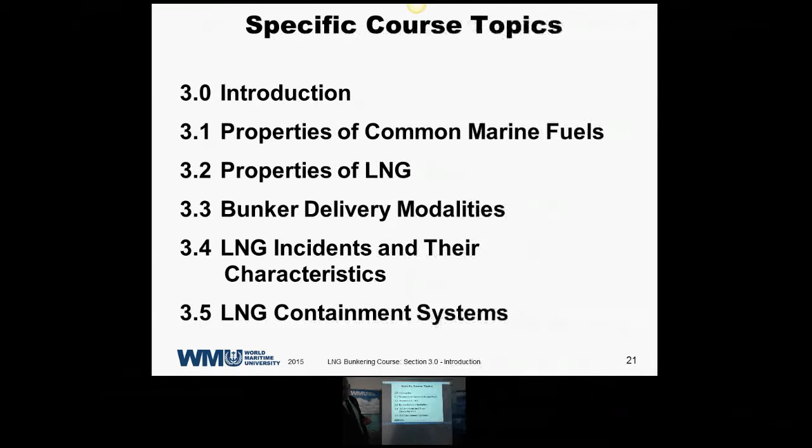It is a rather long course. Keep in mind it is 5 days. So basically this will take place tomorrow. More to come on Wednesday. Some practicalities on Wednesday and Thursday. And finally, the notorious exam. Keep in mind, it's not something threatening, it's just for quality assurance, or it makes sure that we all take part in the course.

So, what is the expectation from the students, or how students should prepare themselves? To begin with, we all know that this might not be available. Ideally, Module 1 should have created this background. However, keep in mind that the content of Module 2, this is not a requirement. This is nice to have, not a must-have.

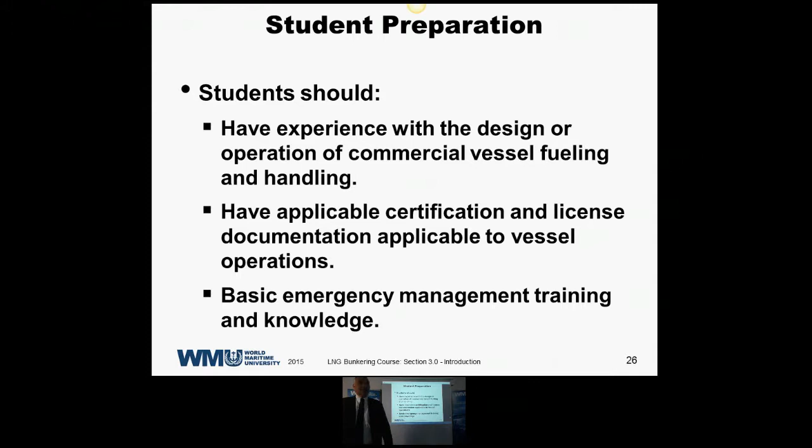For those that will take part in the course, because the practical element will be reinforced, it will be a necessity to have applicable certification. For you, it's not. Okay, and basically, to have some basic emergency management training and knowledge, I'm expecting that up to a level this is available from each and everyone that is taking part in this course.

Now, there is an academic, I would say it's more industry-oriented textbook, which is this one. A lot of the material in the course is reflective with contents in this book. Furthermore, for those that want to deal more, there are supplemental readings, these two being the strongest example.

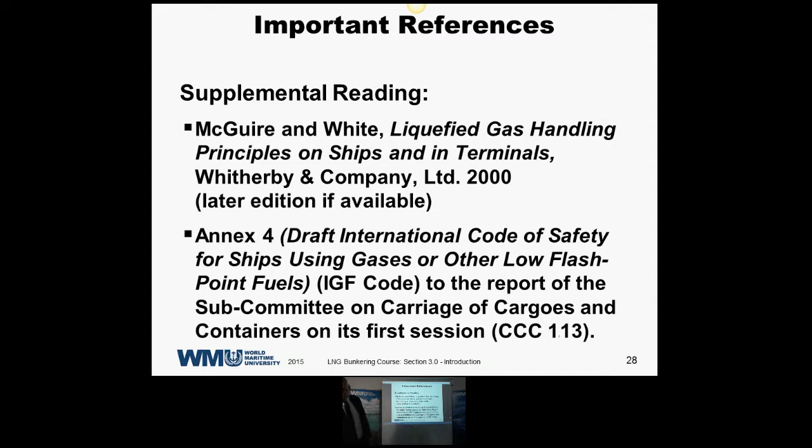And of course, you cannot get away from the classification society. So basically, this is dealing with the security aspect. However, there are also important guidelines from the classification society. And if anyone wants to deal more, feel free to browse through these two important documents.

Now, hopefully you had enough with the orientation. Even the UK should probably be awake by now. So, the purpose of what follows is to provide a short explanation to create a uniform background, even if you don't have previous experience with LNG or even the maritime industry.

An important thing to note, public understanding in discussion is still limited. The public right now has some type of fear. If you see an LNG bunkering operation and you see some type of steam or fog, you're getting worried, is it working properly? Is this done the right way? Is it safe? To remove any worries, yes, it is completely safe. If it's done properly, let me put in brackets.

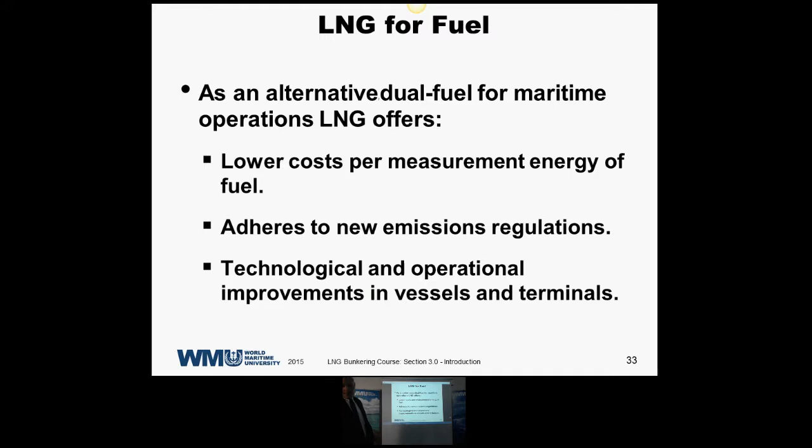Especially in Europe, the European Union is strongly promoting the use of LNG. In the United States, based on the recent developments on emissions, there is a strong interest for LNG, either in conversion of old vessels or mainly in new builds. Especially in regions like Scandinavia or in both coastlines of the United States, which follow into the SECA regime, LNG is a very good and cost-efficient way, let me add, in order to conform with these strict regulations. The SECA is, you can find the explanation of the acronym over there.

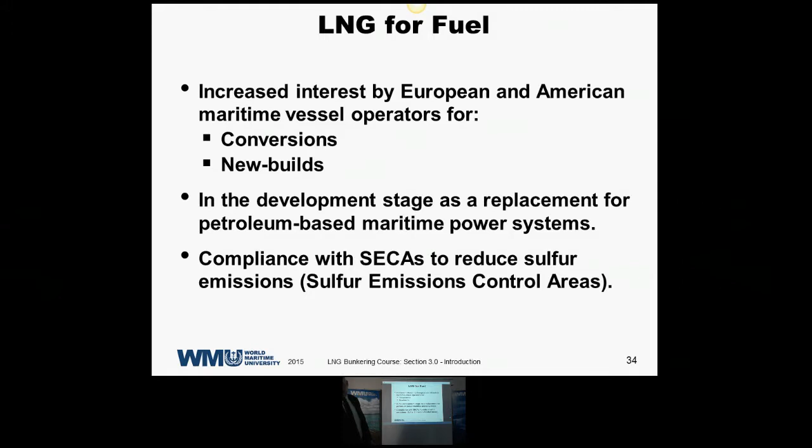So, what is the current status? In Europe, right now, we have roughly 50 ports that can serve LNG bunkering. The idea is, within a rather optimistic framework, to achieve capability in all major European ports, and by 2025, in all inland waterway ports.

So the idea is that Europe will be LNG compatible in the near future. Things to note, however, through the IMO regulatory efforts, this will be alleviated.

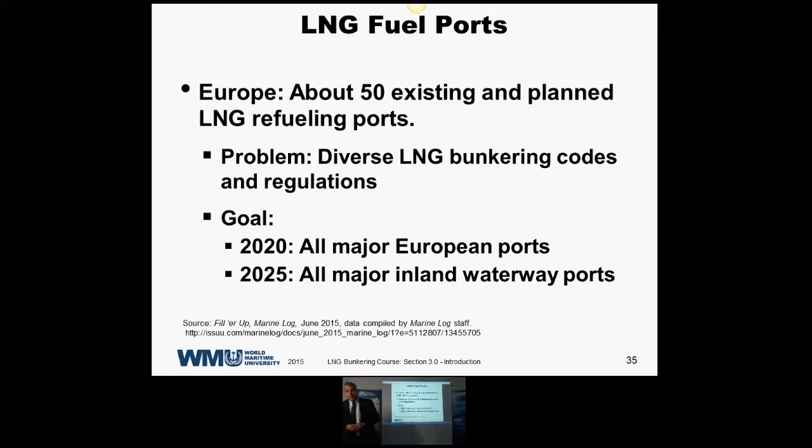A very important element, in order for LNG to be used, it needs to be cooled. It must be cooled heavily in order to be turned into liquid. Keep in mind, it's gas, so you need to freeze it heavily and turn it into liquid. Then you can store it in some type of tank and transport it.

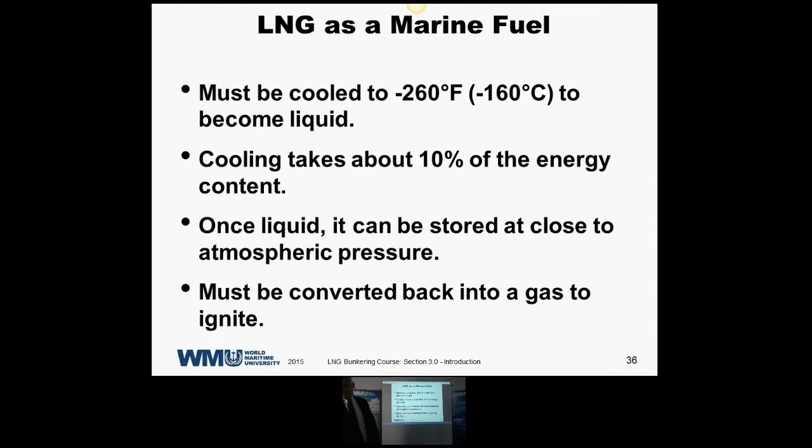Why cylindrical? For uniform compression reasons, with the respective insulation, in order to maintain its low temperature. Then suddenly you have increased your storage capacity compared to conventional fuel tanks. So you might have less performance, but you are having more fuel available.

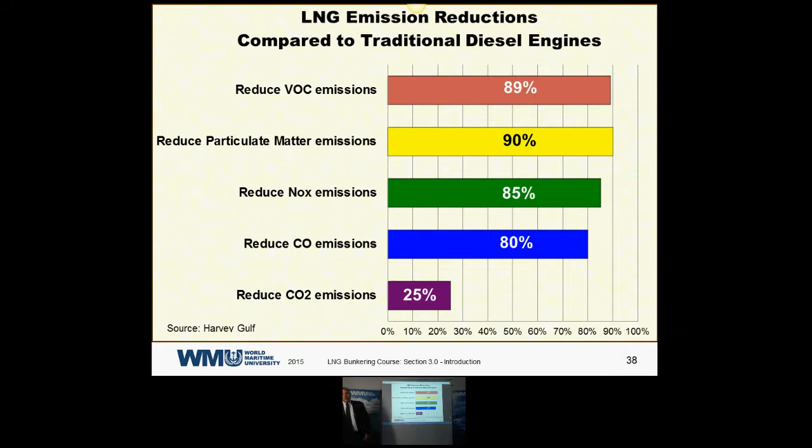If we look back into history, LNG is not something new. In 1959, it was the first effort. Over the years, there was an increase.

Let me also say that very recently, developments that took place in Japan with the destruction of the nuclear reactor, and the decision of the Japanese government to stay away from nuclear energy, heavily promoted the use of LNG in the Asia region. So practically, during the last couple of years after the Fukushima destruction, tremendous quantities of LNG were transported towards Japan in order to support its energy needs.

If we want to take a very quick look at the design, which hopefully Module 1 has covered the great majority of all this - basically, this is the standard form of an LNG tanker ship. So what do you have? You have a vessel that is capable of carrying the tanks.

I will not provide any more details on this issue. This was covered in Module 1 extensively. However, in order for everyone to have a uniform background, when we are talking about LNG cargo ships, this is what we expect to get.

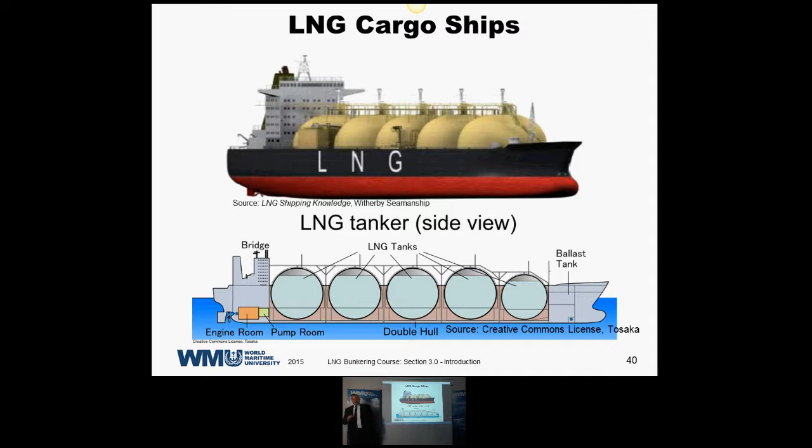Let's also provide a short explanation of the whole LNG fuel transport process from the source up to the end user. So definitely you need some type of refinery that will load the ship. There are other means of transport such as trucks or barges, self-propelled or with a tugboat, and they can deliver to various fuel stations, if we can use this term.

So for example, here we have a fueling station on land that is used in land transport, or we have bunker stations that are serving ports, or large bunker vessels in order to serve the end user - a truck, so he will go to the respective fuel station, or ships.

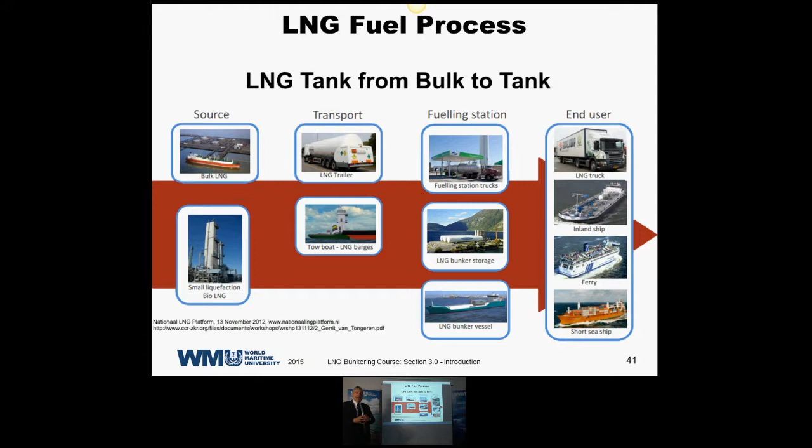Keep in mind, for the time being, because the infrastructure is limited, this is a rather short endurance. You cannot go to any point of the world, from any point of the world to the other, with LNG for the time being. You need refueling, infrastructure is not there yet. However, in the years to come, infrastructure will be greatly enhanced.

Some examples. So basically, for ferries and short distance shipping, this is a very good example. So in the United States, in the Great Lakes, or in respective areas with short distance, so ferries. In Canada.

When you have standard routes such as the service of an offshore platform, it is easy to allocate this task to an offshore supply vessel. You know point A, you know point B very well, you know the endurance of the ship, then why not take advantage of lesser emission and cheaper fuel?

And of course, keep in mind recent developments. It's not only ferries that are doing short distances. You can have passenger ships, such as the Viking Grace. The Viking Grace is serving a line here between Finland and Sweden.

It's not only passenger ships. Recently, there were new builds that are serving containers. This is a container ship, and this is the proposed layout for propulsion. So this is a container ship.

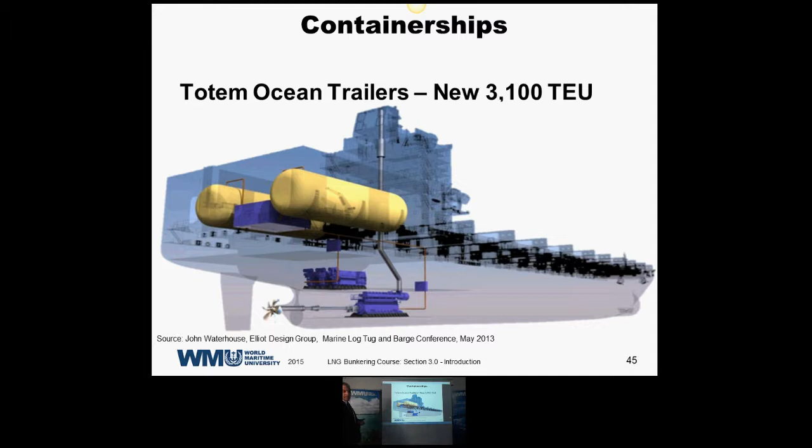But keep in mind, in the long run, there are only dedicated ways to make sure that bunkering is taking place. These are the alternatives: on the pier via truck, or on the pier by a dedicated vessel. If it is a dedicated truck, or if it is a permanent infrastructure in the form of pipelines, it makes no difference. Or the other way is to get a bunker vessel alongside.

Similarly, like fuel oil is transported in major ports, the infrastructure is not there today.

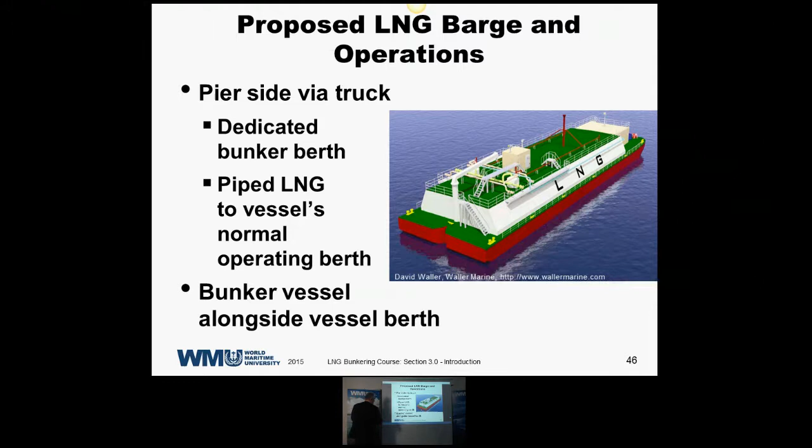So, to recap, LNG is steadily gaining on ground. Here are some potential projects. You can see that transport capacity in the domain of container ships is steadily increasing, and very recent developments, since now infrastructure is booming, large passenger ships, such as those coming from Carnival, will be using LNG as their means of fuel.

So clearly, there is a tendency to promote LNG further. As infrastructure for bunkering is expanding, so will end users take advantage of this opportunity. Because of two main reasons, lower emissions and cheaper fuel, clearly LNG holds a comparative advantage.

So to cut a long way short, very recently, Carnival - and why are we using Carnival? Because Carnival is one of the largest, or the world's largest, cruise ship owners, has finalized contracts for four mega passenger ships, because the capacity is extremely large. Clearly, if you are willing to allocate the safety of all these passengers to an LNG vessel, I'm guessing that any fear related to LNG operation and bunkering should not be there in any place.

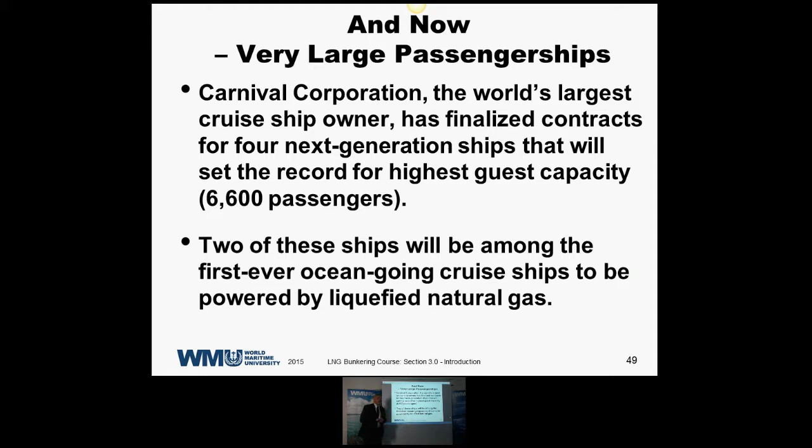Who else? We've mentioned Carnival. Clearly here in Scandinavia, because of the regulation of SECA, Norwegians are also pioneering this domain.

Initially, in order to create a link with Module 1, at the end of this presentation, we will show a video of the operation of an LNG tanker. Unfortunately, when you are relying on YouTube for issues like that, the owner of the account can remove it, so it's not available. So, although officially in 3.0 there was a video from YouTube, this was substituted by supplementary material from DNV GL that will explain the bunkering taking place in exactly this location.

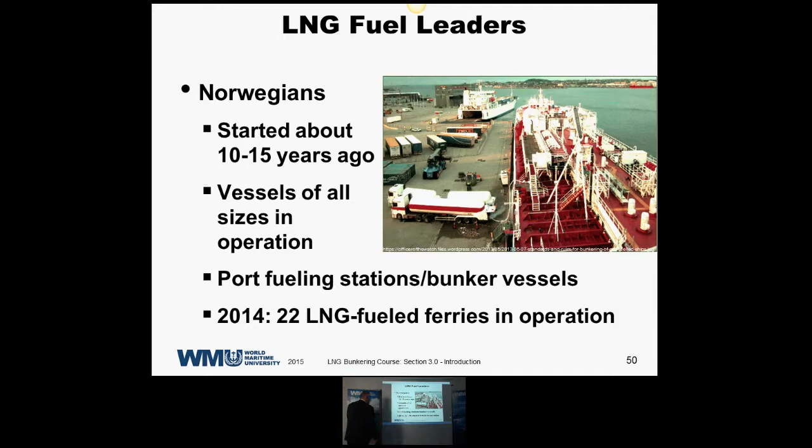So Norwegians, or the whole Scandinavia, and also Western Europe, are strongly promoting this - Netherlands, Germany, Belgium. There are other partners, or different projects within the EU trying to promote the use of LNG in various ports. The United States were mentioned earlier.

Ferries. The question here remains, however, infrastructure is expanding significantly. And we all know that infrastructure and the end user are strongly related. So as infrastructure is expanding, the end users will be more willing to take advantage of LNG. As the end users are more willing to take advantage of LNG, the more infrastructure will expand.

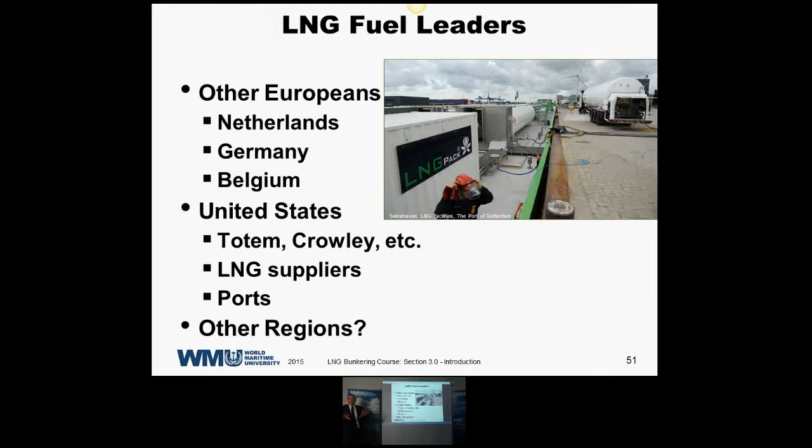Now, not everything is without precaution. You need to take into account that spills can happen. So basically, you can have a spill. But, as you will see later in this course, there are responses and ways of dealing with this type of incident.

This is another issue that needs to be addressed in this course. This is why - you cannot see it with your own eyes, you cannot smell it, there is no color indicated. So definitely you need special equipment to be able to deal with ensuring this is not happening.

And of course, we need to think about what if a spill develops into a fire incident, and what are the potential ranges. So in order to mitigate that this will never take place, if you don't want a fire, you don't want a spill to take place. It's as simple as that. So avoid any spill and you reduce the chances for a fire.

And the terrorism issue, we will highlight but not deal with too much. Keep in mind, those that are not experienced with LNG have the tendency to say that an LNG tanker is a floating bomb. At any case, an LNG ship is not a floating bomb.

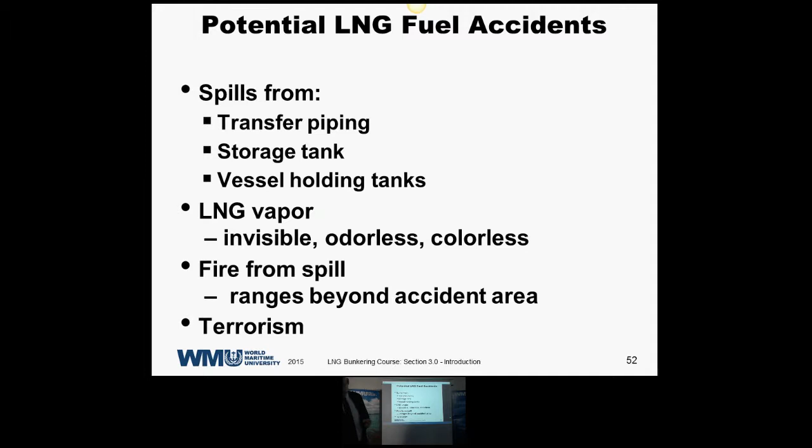The industry and IMO have taken every measure to ensure that LNG transport and bunkering procedures are completely safe. And if you apply the right security measures, everything will be safe and secure. Of course, in order to do that, you need to increase safety and risk management on board vessels and within the port.

Keep in mind that LNG shipping up to date has an excellent safety record, basically zero incidents. This is a strong indicator that practices employed in this specific domain are quite safe. And of course, one of the main purposes of this course is to make sure that this excellent record will continue at the same pace.

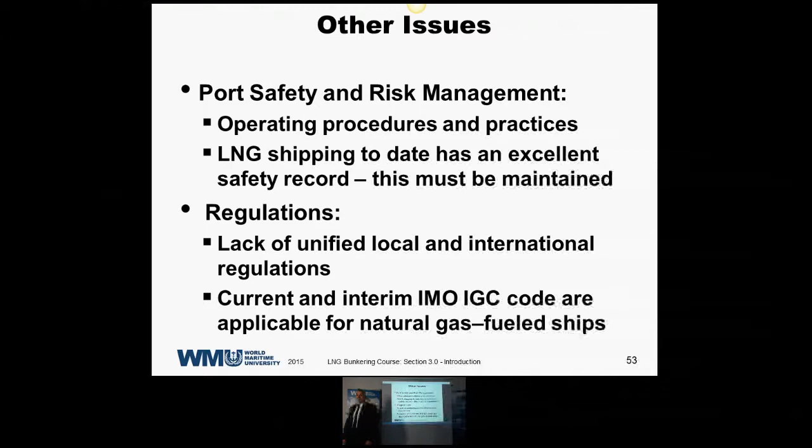Food for thought: yes, we're still not uniform in regulation, however, IGF is already in place, and hopefully these efforts from IMO will make sure that everyone is moving in the same direction.

There are issues. For example, there is the need for environmental assessments. Definitely we need to make them mandatory.

Public opinion - for the time being, the general public is not educated well enough about LNG. So one of the main purposes of this course is to transform you into ambassadors about LNG safety. And these are the main topics that we need to further address in order to change public perception about LNG.

Is it possible to maintain zero level of accidents? Yes, it is. How? Good training and enforcing safety culture.

Terrorism, hopefully we will manage with preparation and risk mitigation. And of course, we need to discuss the interface of maritime transport with other modes of transporting LNG, because as we know, every time there is interaction, there is an increased level of risk. Different mentality, different language, different habits, different type of training.

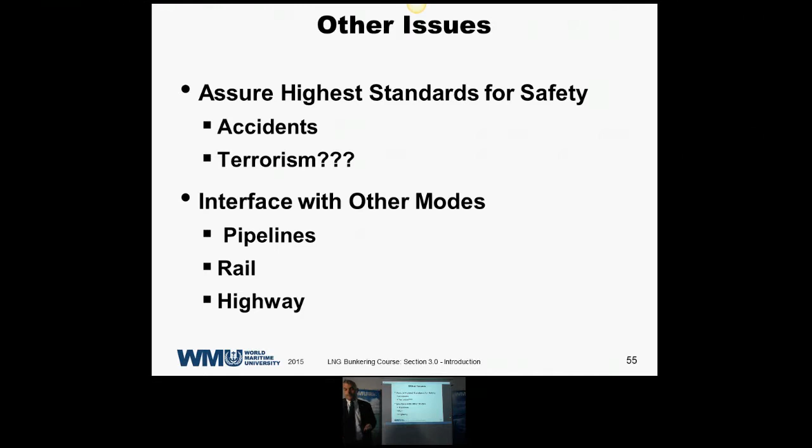Reaching the end of the introduction, hopefully we have covered, if anyone was missing some elements of module 1, with only one slide. So I need you to focus on these issues.

Yes, LNG operations, bunkering operations are complex. But if you train properly and if you employ your training right, it can be done safely.

LNG demand is increasing globally. Keep in mind that for the time being, there are already significant dual fuel ships involved in maritime transport, such as the Viking Grace. But of course, there are still pending issues. Not everything is solved yet.

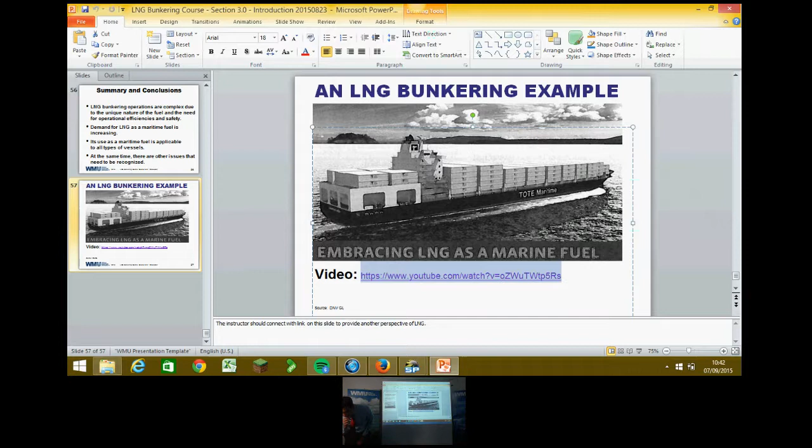Thank you. Yeah. I'm okay, I'm okay. Sorry? Yeah. Yes, we are. Should we mute ourselves? We can.

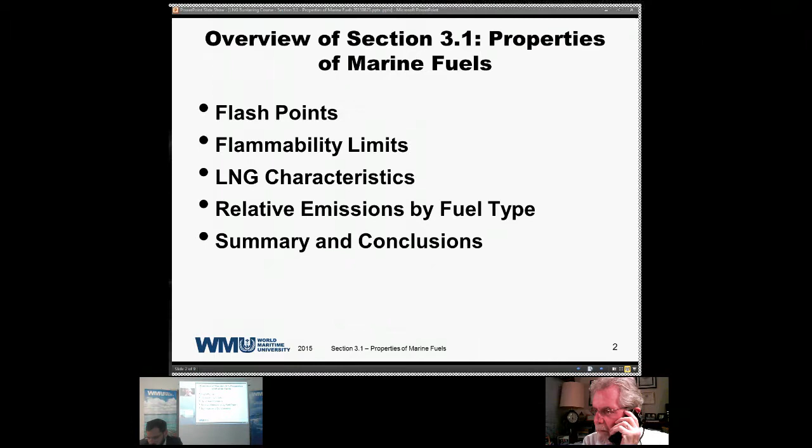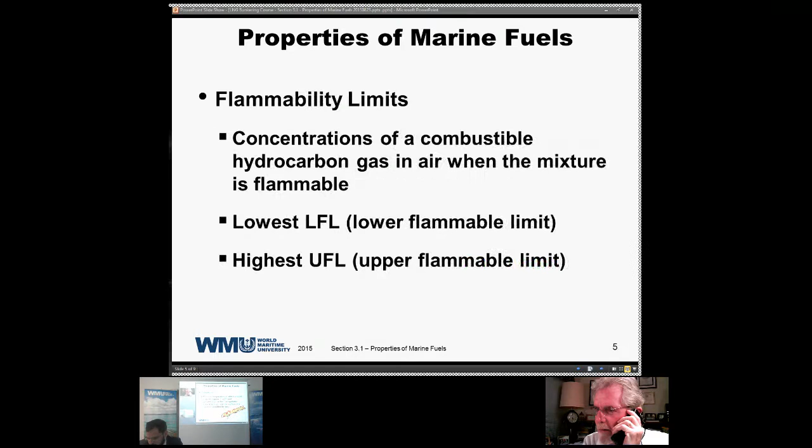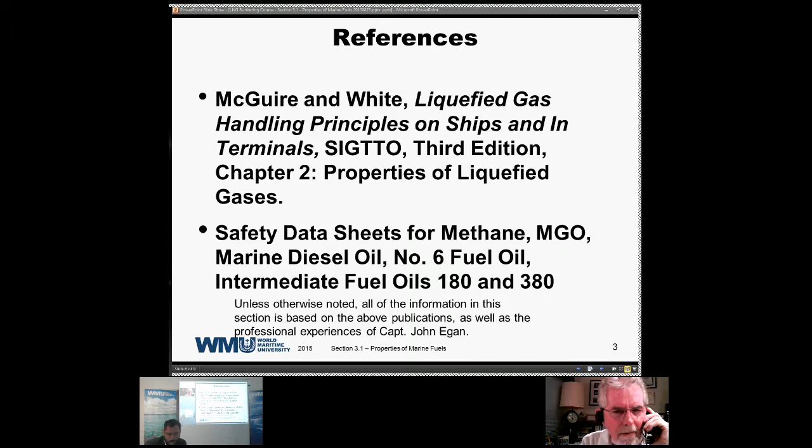Okay. And he can chat with the student on the text if there's anything you see as you're going through, if somebody sends you a question. Okay, good, perfect. So we're good to go right now then, right? We are. Okay, that's straight for us as well. Okay, very good. Talk to you later.

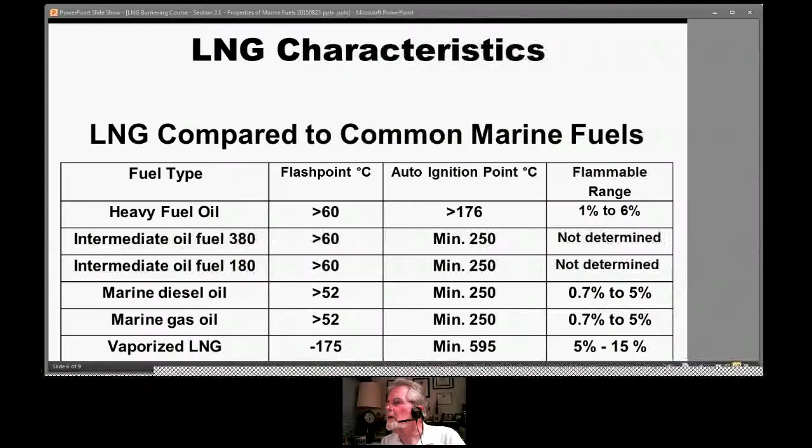These have the same characteristics. They have a flash point of about plus 60 degrees centigrade. They have a very, very high auto-ignition temperature, which is the temperature at which it will ignite. If it just reaches that temperature, the fuel will ignite and burn. And they have a flammable range that's relatively lower than what we normally find, about 1 to 6%.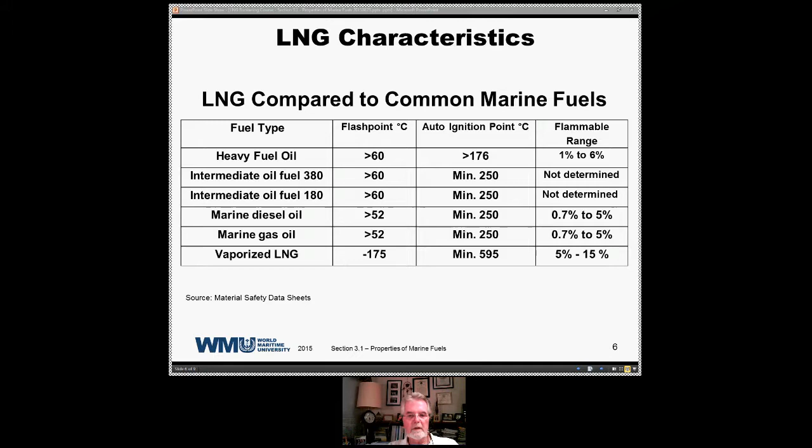We could then go to marine diesel oil, your marine gas oils. These are a little bit more refined product, but they're also more expensive, with less emissions than bunker C, but still a relatively high amount of emissions.

And then we have our vaporized LNG, which has a flash point of minus 175... minus 170. Don't believe that, I believe that's an error. I have to double check that. And I apologize for that.

Okay, I'm going to... okay, I'm sorry about that. I will double check that and get back to you on that. That's, I don't believe that's correct.

And you have an auto-ignition point temperature of 595 degrees centigrade. So you can see there are some relatively big differences in how this particular product reacts, and what has to be done to it in order to use it as fuel.

We'll quickly take a look at the relative emissions. And for some reason, we're not sharing this. I don't know why. Okay, you can see the PPT. Okay, all right, I'm not getting indication on my screen. Okay, thank you very much. And I will get that correct number for you.

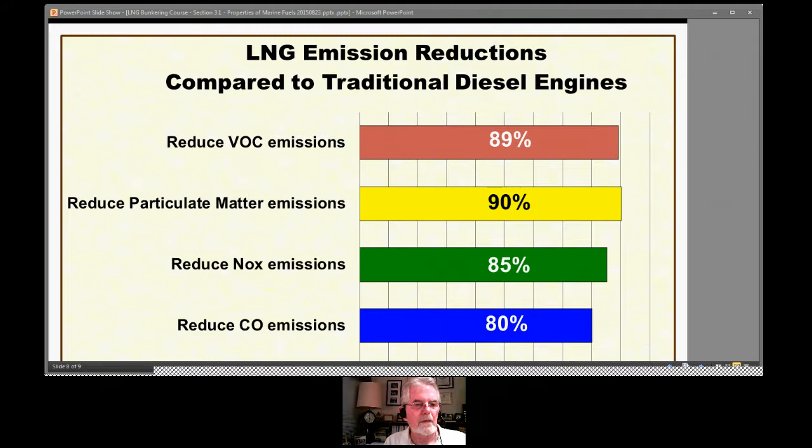You don't have to be rocket scientists, any one of us, to understand that by using natural gas as a source of fuel, we are going to greatly reduce emissions, and environmentally, this is a very, very friendly fossil fuel.

Is it the ultimate answer to emission reduction? Probably not, but it will be an interim step as we continue to increase our knowledge and technology. Once that's done, we'll probably find more fuel-efficient means of fueling vessels, as well as fuels with even less emissions than natural gas. But for the foreseeable future, we're going to be seeing the use of natural gas on a worldwide basis.

So keep in mind the definitions of flammability. They are important properties of marine fuels, and characteristics demonstrate the commonality and the differences, especially in emissions, which is the major point. The establishment of this is the platform on which we build.

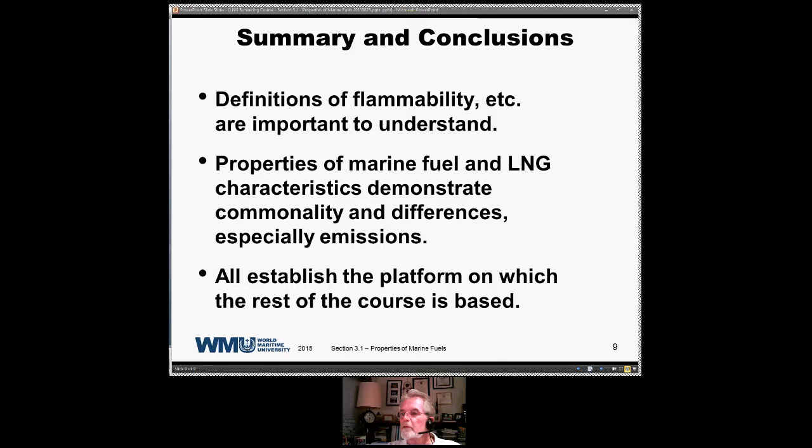I'm going to back up here just a little bit, because these are important items. Okay, flashpoint and auto ignition.

Flashpoint is the minimum temperature at which a liquid gives off vapor in sufficient concentration to form an ignitable mixture with air near the surface of the liquid, as specified by a test, and this is determined under laboratory conditions.

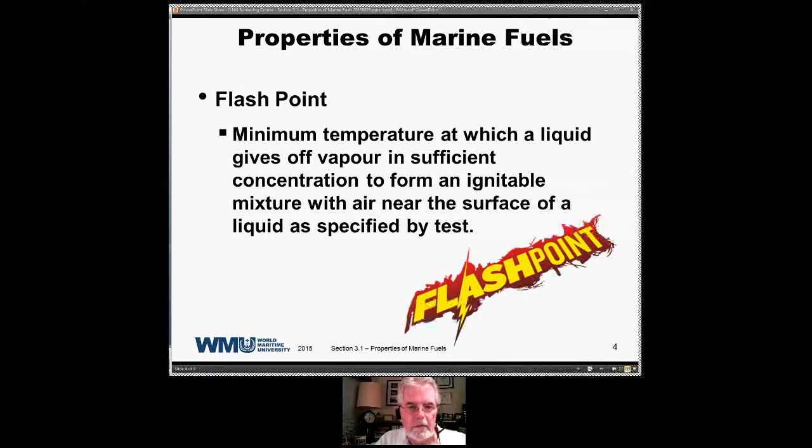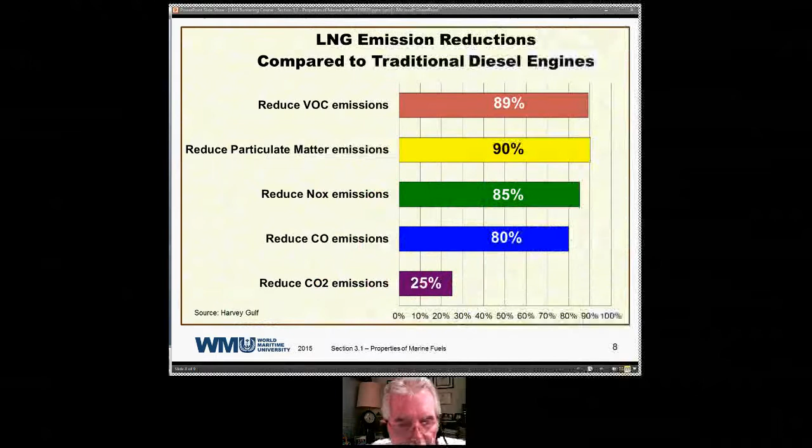Auto ignition, and this is important, remember flashpoint. Auto ignition is if you heat marine heavy fuel oil up to 160, 176 degrees, it will ignite.

So that's the difference between auto ignition and flashpoint. Flashpoint is the temperature at which you get a vapor that, if you get a source of ignition, will ignite. Auto ignition is the temperature at which it will automatically ignite on its own once it reaches that temperature. So bear in mind the differences between these two, flashpoint being important as well as auto ignition.

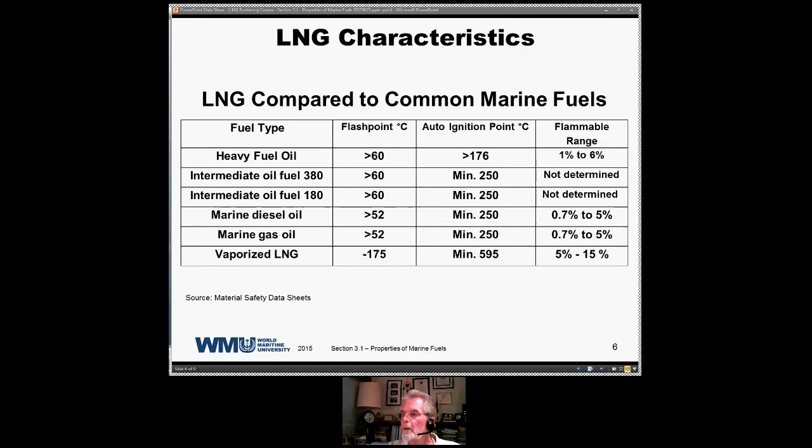As we go through the course, please kindly note, if I say something's important, please take note of it. This will be helpful to you when you get to Friday. All right, let's move along here and get into our second section.

Properties of LNG. We're going to take a look in this section at the components of LNG, properties, composition, characteristics of natural gas. We're going to take a quick look at what are called the gas laws, the ideal gas laws, saturation pressures, flammability, and vapor dispersion.

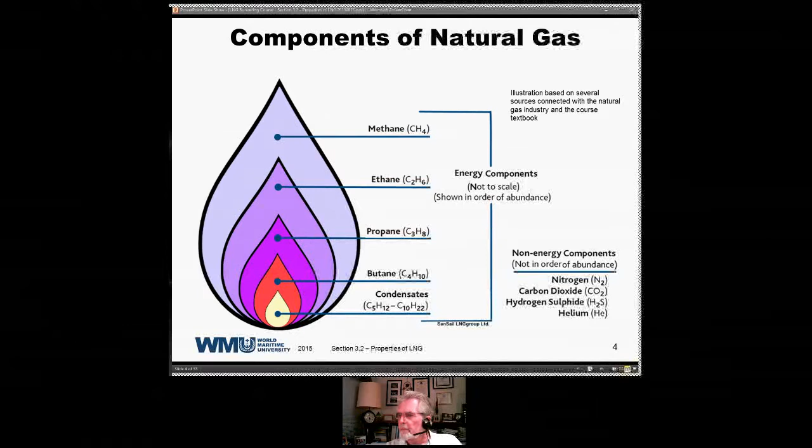You may find up to 1% nitrogen in a cargo of liquefied natural gas.

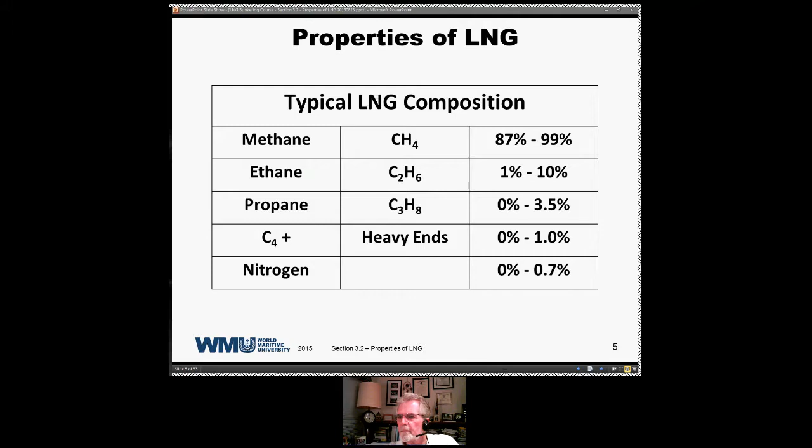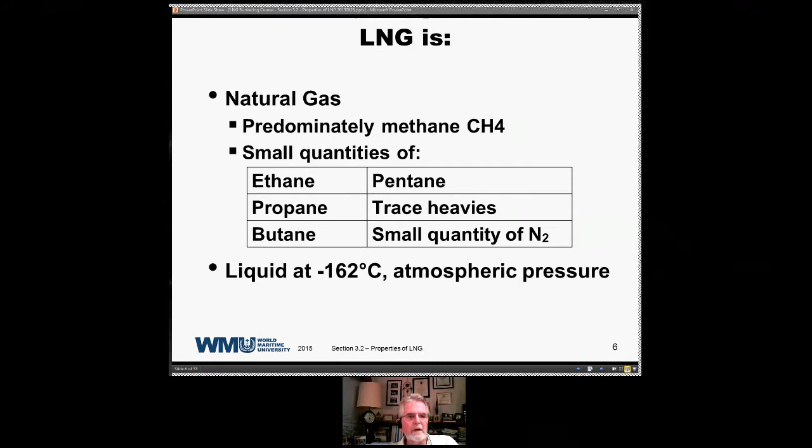Natural gas is predominantly CH4 with small quantities of other components like ethane, propane, and pentane. It becomes a liquid at minus 162 degrees at atmospheric pressure. On LNG tankers in international trade, the cargo is carried at approximately atmospheric pressure, slightly above, at around minus 160. Carriage conditions range from atmospheric pressure to 10 bar.

You're going to find these higher pressures with a particular type of tank. Internationally, there are two types of tankers used, and as I said, you're going to carry the LNG at atmospheric pressure. There are some smaller vessels.

The density of the cargo ranges from 470 kg per meter cubed to 360 kg per meter cubed. Normally it's in this little bit higher range as a typical LNG cargo that you're going to find on an LNG tanker.

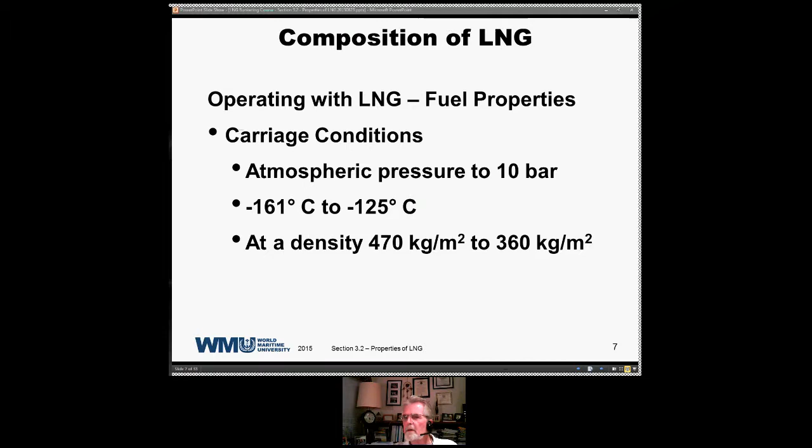We're probably looking at something like 500 ships in international trade now - I'm pretty sure we're up into that range. These ships are very, very sophisticated, very robust in their construction, and have a safety record that is probably the envy of the international shipping industry.

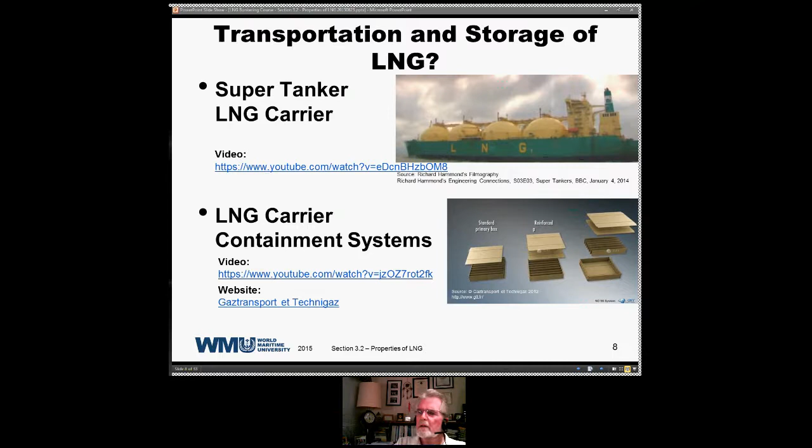The LNG has to be cooled to approximately minus 160. Cool, compress, cool, compress. And at minus 160 degrees it becomes a liquid, and at that point it consumes 1/600th of its original volume. This is what makes the transport of LNG by vessel feasible - otherwise it couldn't be done. If you were trying to transport a vapor, first of all you couldn't build a ship big enough, and you can't build pipelines big enough to transport the volumes we're talking about.

So we take this product, we cool it down to minus 160. It takes on to form 1/600th of its original volume, and we now find it economical to transport, handle, and use.

At ambient temperature, because it's much higher than the liquefaction temperature of LNG, the liquid is always boiling. The best comparison is a pot of water on your stove that you heat up until it boils. This is what LNG liquid looks like inside the tank of the ship. It's constantly boiling. At the surface, the liquid turns to vapor, and as it turns to vapor, it removes heat from the environment, and that removal of heat keeps the liquid cold. So it's always boiling and cooling, boiling and cooling.

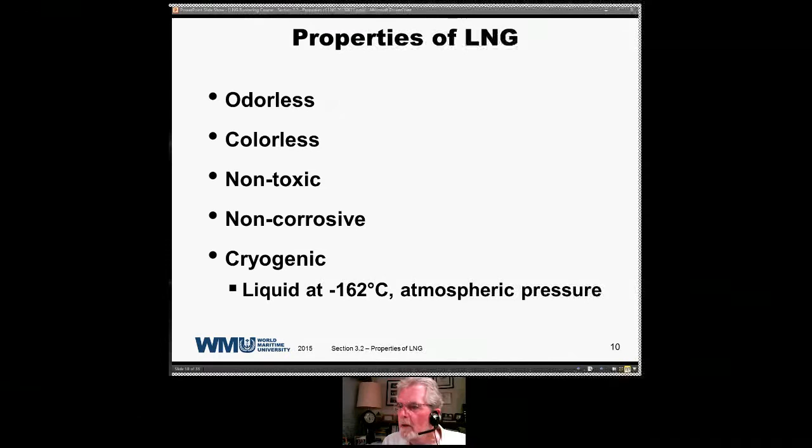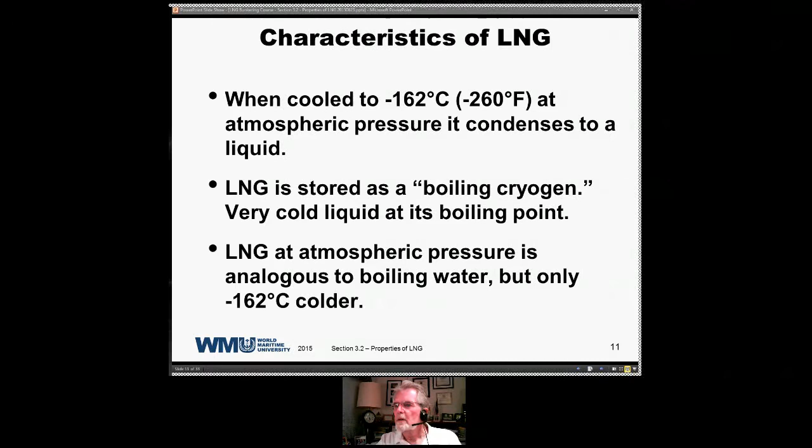Okay, characteristics again. When cooled to minus 162 at atmospheric pressure, it condenses into liquid, and it's stored as a boiling cryogen. As mentioned, it's just like a pot of water heated up to 100 degrees that boils - this is what LNG does. It boils. It's a very cold liquid at its boiling point, about minus 160 degrees at atmospheric pressure. The temperature of the boiling water, to run back to that analogy, doesn't change even with increased heat. It's cooled by the steam evaporating from the surface, cooled by the natural gas evaporating. It stays at a constant temperature, kept at a constant pressure.

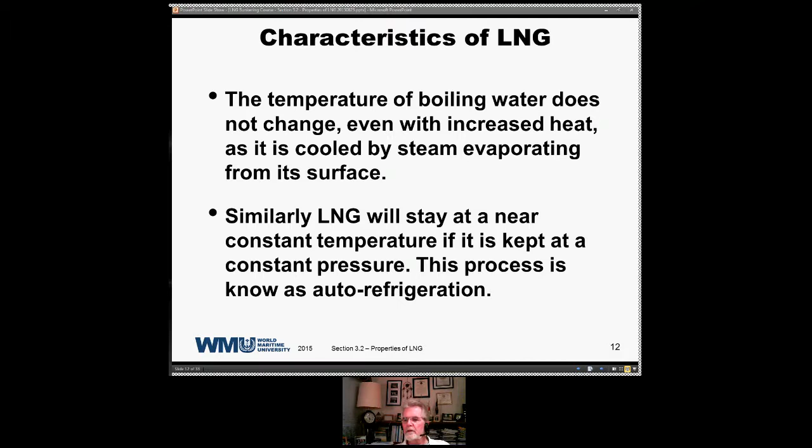This process is known as auto-refrigeration. So if someone asks you how this stuff stays cold, you just say it's allowed to boil - it auto-refrigerates. You can use this same analogy with boiling water, just that it happens at a much colder temperature. So as long as the LNG boil-off vapor is allowed to leave the storage tank, temperature will remain constant. You have to allow this to boil when it's on board the carrier vessel.

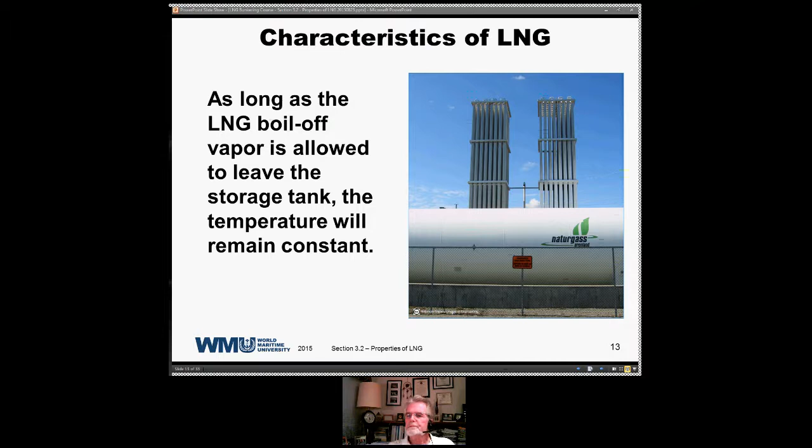There's a phenomenon unique to LNG called rollover, and this is something a vessel doesn't worry about - the vessel is a dynamic platform. But it is a concern for shore tanks. As LNG weathers, the density increases due to the higher percentage of ethane and propane in the mixture. How does that happen? Well, the methane in the natural gas boils off before these other components do - minus 160 degrees for your natural gas, and your ethane starts to boil around minus 80. So the ethane, propane, and other heavy ends stay liquid longer because they boil at a much higher temperature.

As the methane boils off, the product vapor leaves and the product is left at a higher concentration of propane. So if you're filling a shore tank, and you bottom fill it with a lower density, colder, unweathered LNG, you can cause stratification, getting a heavier layer of weathered LNG forming above a less dense lower layer.

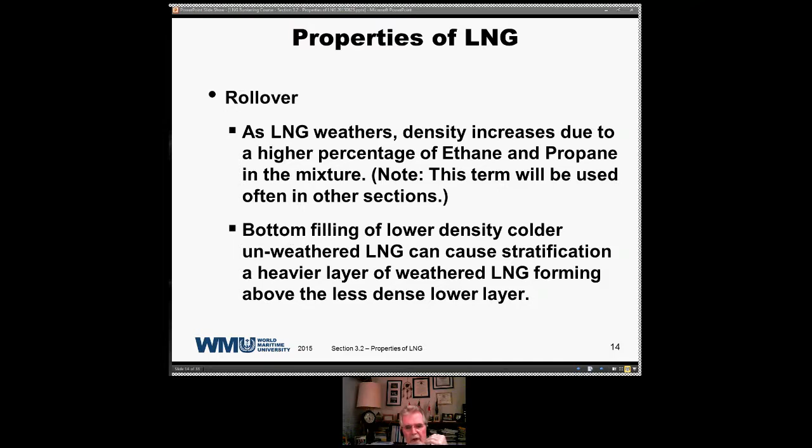When this happens, you get a tremendous increase in pressure in the tank, and this pressure increase can be such that it will damage the tank. So this is a concern. It's important for shoreside personnel to pay attention to how your tanks are loaded and how the cargo is transferred from tank to tank, and that pressures and temperatures are monitored at all times to prevent this from happening.

So rollover is a spontaneous mixing that takes place to reverse. It's an instability you have in the tank, and it results in a rapid release of boil-off vapor. As I said, it usually occurs in shore tanks where there's no dynamic forces to cause mixing.

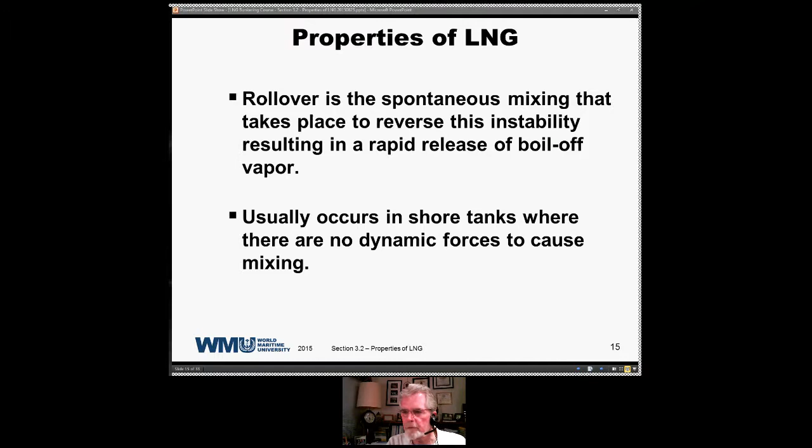I'll touch briefly on the gas laws. I'm a sailor, folks, I am a sailor. I'm not a chemist, I'm not a physicist. If your background is in this area, please bear with me.

I'm just going to briefly go through how gases react under ideal conditions. There's no such thing as an ideal gas, however there are relationships that have been described that explain the phenomena we observe in the handling of LNG boil-off, and also with all other gases.

With LNG boil-off, if the product temperature is increased, there's going to be an increase in pressure. If you decrease the temperature, there's going to be a decrease in volume. And if you increase the pressure, you're also going to have a decrease.

One of the first gas laws is Boyle's Law, and this applies to gases at a constant temperature. Volume of gas is inversely proportional to the absolute pressure. As you can see, as the pressure increases, volume decreases. This will hold.

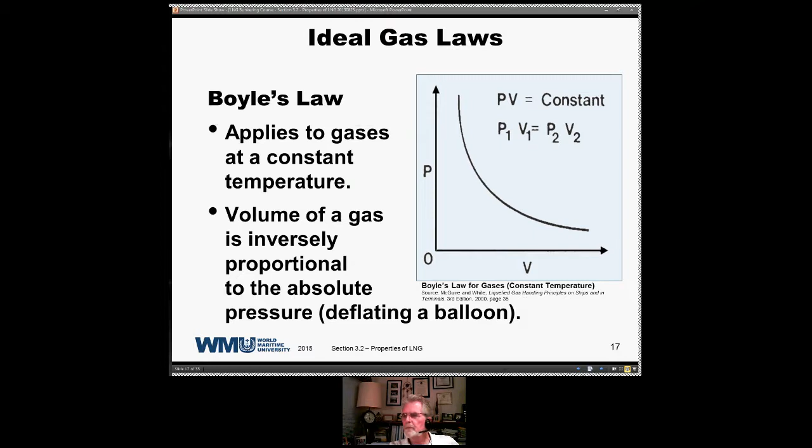Charles's Law applies to gases at constant pressure. We're going to maintain a constant pressure, and as the temperature increases, volume increases; as the temperature decreases, volume decreases. This is what happens when you put an empty soda bottle in the freezer. It reaches the freezer temperature, and that plastic bottle eventually collapses.

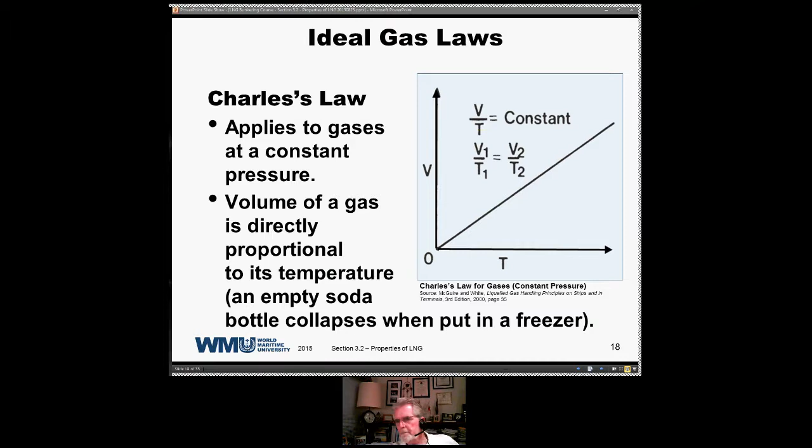And your pressure law applies to gases at constant volume: increase the temperature, increase the pressure; decrease the temperature, decrease the pressure.

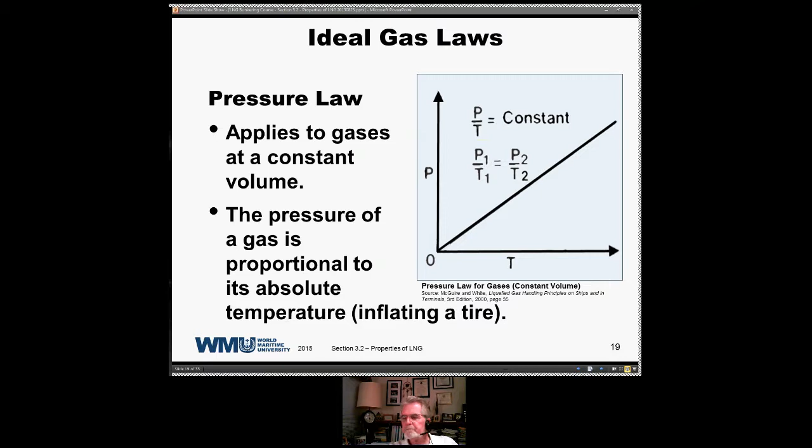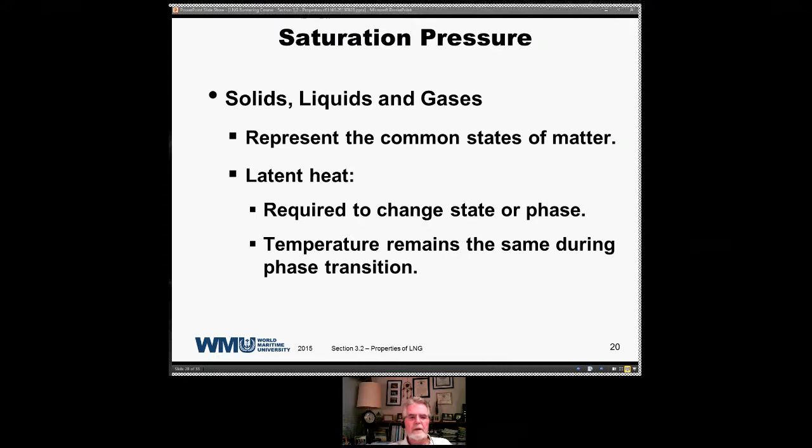We have a solid, we increase the temperature, and eventually it reaches a point where that solid is going to transfer from the solid into a liquid. We keep adding heat—this is latent heat. At that transfer point, the temperature is going to remain the same. So we reach a point in temperature, continue adding heat, the temperature remains the same, and then we get this change of phase to a liquid.

When the change of phase takes place, we continue to increase the temperature, and the liquid temperature continues to increase. Again, we reach the phase where we're going to change from liquid to vapor, again adding latent heat—vaporization or condensation. Vaporization is going from solid to liquid to vapor, and condensation is the reverse.

So we keep adding heat, eventually we reach the point where it changes over to a vapor, and again the temperature increases after that. And this is what happens to the LNG.

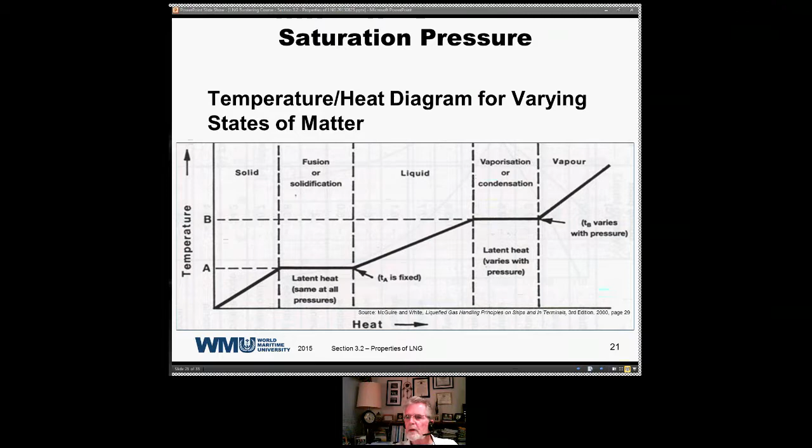We have a saturated vapor—a vapor phase that is in equilibrium with the liquid phase. In other words, once we reach that point, this is that boil-off point inside the tank. The vapor phase, changing from liquid to vapor and vapor to liquid, is transferring back and forth as the temperature increases.

When it changes over to a vapor, we're withdrawing latent heat, so we actually get some phase change back to a liquid. This is the process taking place at the top of the tank—this is the saturated vapor, the saturation pressure of the tank. Liquid and vapor phase are at the same temperature, and saturation depends upon the temperature and pressure.

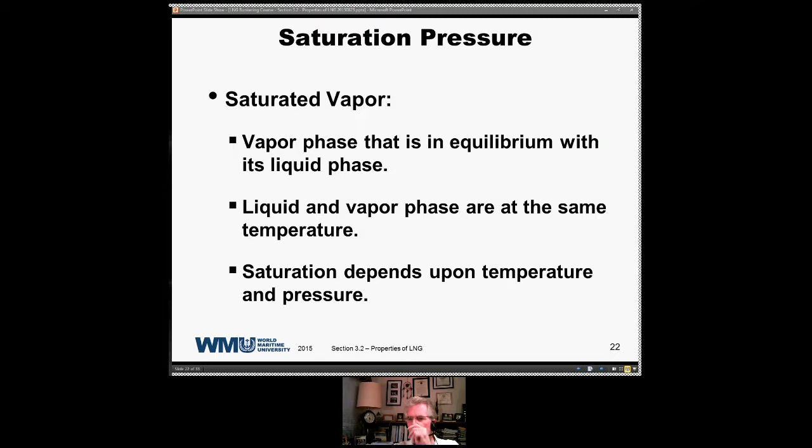The pressure of saturated vapor is at a specific temperature, as saturated. Different gases have different saturation pressures. So for LNG, this temperature and pressure will be totally dependent upon the composition of the product. This can vary from transfer to transfer. Each time you get the LNG, it's going to be a little different.

That was probably one of the most interesting things about working with LNG over the years. We used to load cargo, sometimes at the same port time and time again. People would say, well, doesn't that get boring? It's the same stuff. The answer to that was absolutely not. Every time you loaded a cargo, it was a little bit different from the cargo before, and it reacted differently. So each time you handled the product, it was a little bit different and presented different challenges, which made it an interesting product to work with.

We used to refer to it as coming from the fossil decomposition of whatnot, so it's a dead product - but no, it isn't. We used to call it a living product. It did change, it's always changing. Even as you carried it, the product is changing during the entire transit. So it becomes an interesting product to work with.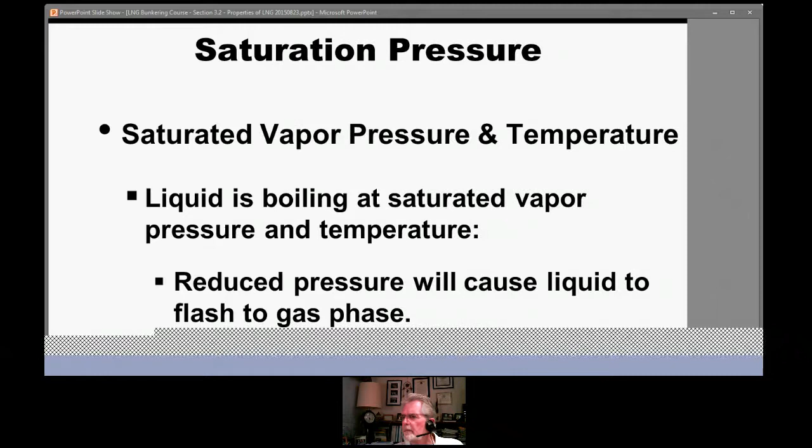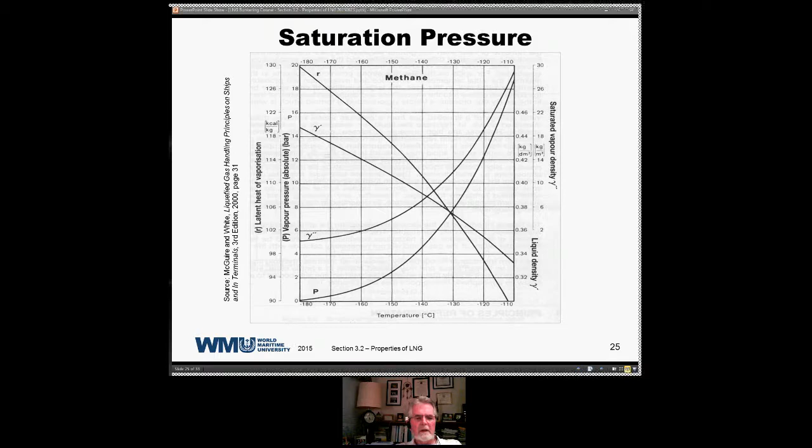Methane flammability in air - again, this is important, you always want to be aware of this. Lower explosive limit is 5% methane concentration. Below this concentration, the mixture is too lean to burn, it will not burn. Upper explosive limit, or upper flammable limit - these acronyms, UFL, UEL, can be used interchangeably - is 15% methane concentration. So anything between 5% and 15% methane in air, you have a flammable mixture. Below 5%, it's too lean to burn. Above 15%, the mixture is too rich.

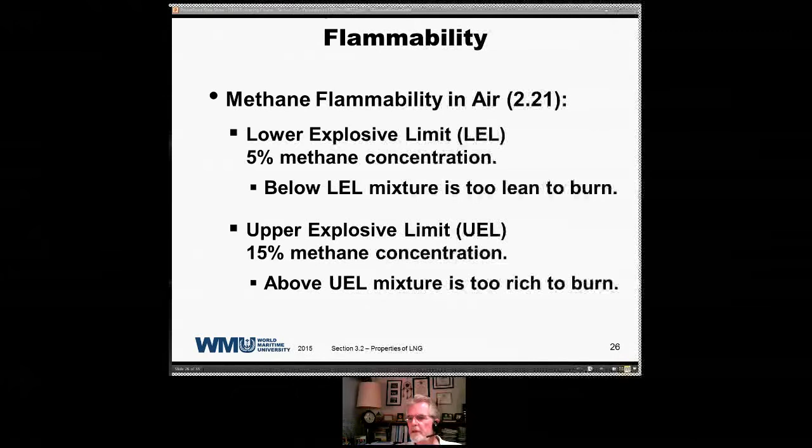This is very much akin to something we've probably all seen, where someone will put a match or a cigarette out in a can of gasoline. If you can get that match or cigarette through the vapor quickly enough and into the liquid, it will extinguish. Same thing with natural gas - of course you're not going to be putting cigarettes out in it, obviously, but the fact is it's the same. If it's too rich, you won't get ignition, and if it's too lean, you won't get ignition either. So remember, 5 to 15% concentration in air.

Also, when looking at the possibility of ignition and fire, we have to have oxygen, obviously. So we have a limiting oxygen concentration, the acronym for that is LOC, 12% oxygen. You have to have at least that - anything below that, you have insufficient oxygen. An inert atmosphere is less than 5% oxygen concentration.

Onboard LNGs, and this will be emphasized in one of the later sections, there's something you would never allow to happen at all: never allow methane to mix with air. There's always going to be an intermediate step, and that intermediate step is going to be an inert environment - inert meaning exactly what the word means, non-reactive. So you have to have an intermediate step where, if methane gets into it, nothing is going to happen. Onboard ships, anything less than 5% oxygen concentration, and in most cases less than 1% oxygen, you have an inert environment.

So the differences between the LOC and an inert atmosphere allow for incomplete mixing of gases and instrumentation error. Onboard ship, it's always much more conservative than what some of these books, rules, or regulations allow. You're always going to be more conservative.

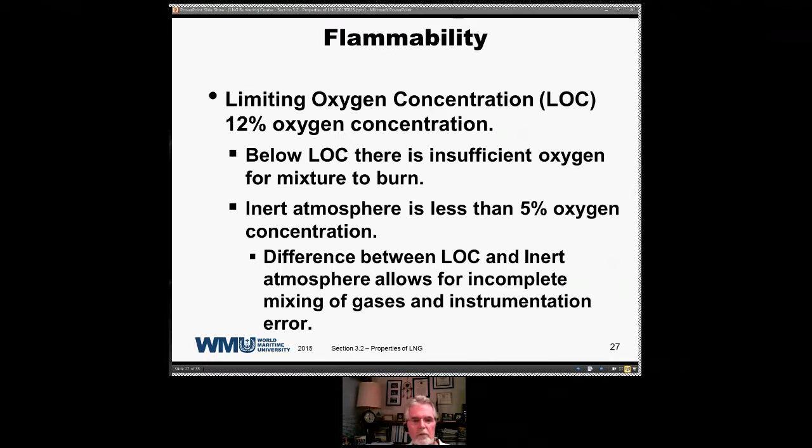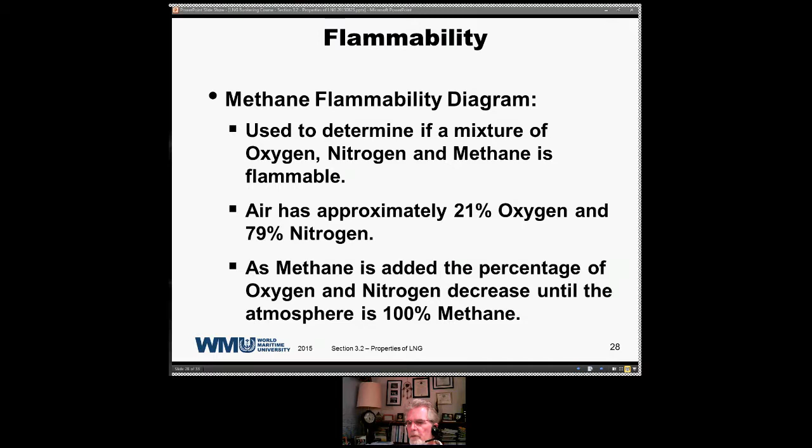We'll take a look at, in the next slide, the flammability diagram. It's used to determine if a mixture of oxygen, nitrogen, and methane is flammable. The air that we breathe is approximately 21% oxygen, 79% nitrogen. As methane is added, the percentage of oxygen and nitrogen in the atmosphere decreases. This ratio of constituent gases over the range of concentrations is the Air Line.

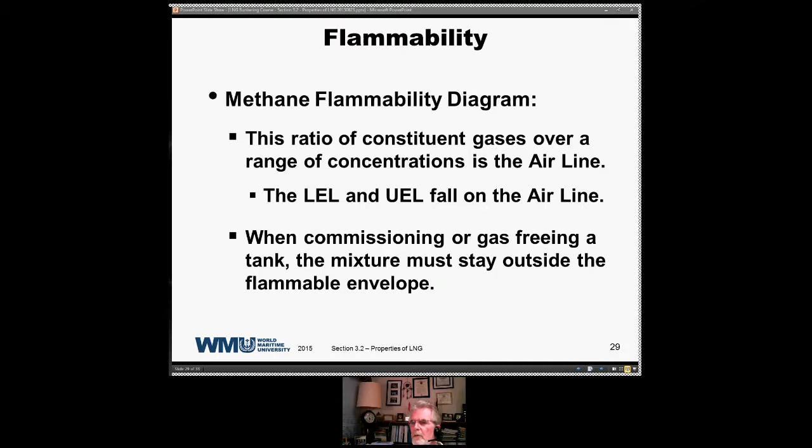So these are the things that are going to be monitored when we're conducting operations on the ship, where you're changing over from a methane environment. You eventually want to get to a full air environment. The easiest way to do that is to totally minimize any mixture of air whatsoever by keeping that intermediate step in there. You go from methane to an inert environment, totally inert, and then you will introduce oxygen into the space. Once you have all of the methane out of it, once the methane concentration is, say, less than 1%, and the remainder is an inert environment, then...

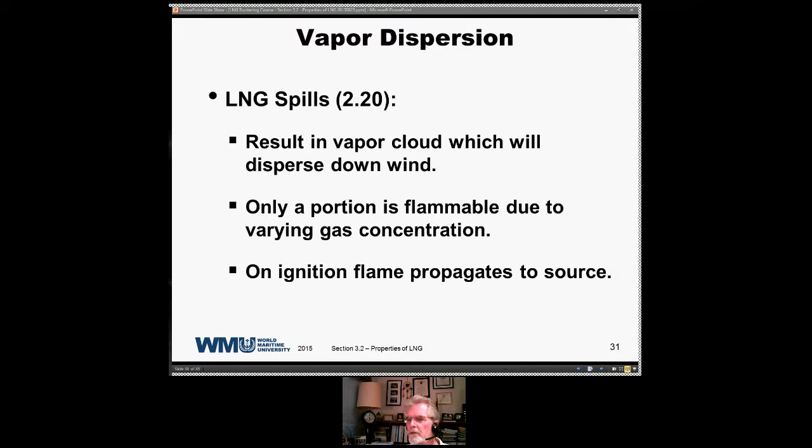And these studies are conducted. We conduct studies whenever a facility is sited, wherever you're going to get the storage or transfer of LNG. Local regulations, rules and regulations are going to require that a vapor dispersion simulation be done, and this is critical to any LNG operation.

Okay, up and running again, back online. Okay.

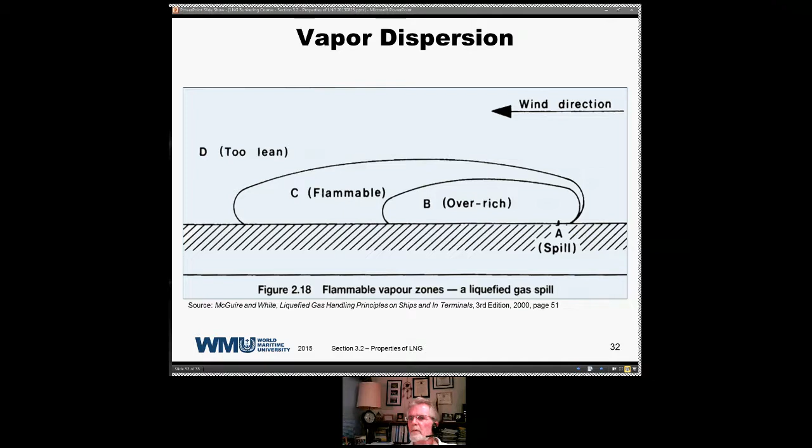Working with LNG is predictable based on proven principle. It's a very, very predictable product, so we monitor the condition of the product at all times. On board, the LNG temperature is constantly monitored along with pressures and densities, and by doing so you know exactly the state of the cargo at all times.

It's going to be very, very similar when you're carrying LNG as a bunker, as you're bunkering fuel. As long as you follow the proven principles, you can know exactly what this cargo is going to do.

The ability to lower its temperature allows for increased storage at terminal and/or on vessels. LNG requires high performance technology and safety procedures. Safety, safety, safety - again harp on safety throughout this entire course. Safety is just so very, very critical.

LNG is still looked upon by the general public as an extremely dangerous product. It is a flammable hydrocarbon - that's all it is. There are vessels out there carrying products that are much, much more dangerous and volatile than LNG, and very, very little attention is paid to them.

But for some reason, LNG is always in the forefront. So because it's in the forefront, it's necessary for us, people who are going to be handling it, using it, to become very, very safety oriented. Safety awareness is absolutely critical and key. Safety and performance depend upon understanding what it is.

There's a lot of myths out there about LNG in society. We still have people who believe that an LNG tanker is capable of exploding all at once, having the explosive force of, God knows, 50 atomic bombs and all this other stuff. That may be potential energy, but that's what it is - it's potential. It's not going to happen because it can't happen.